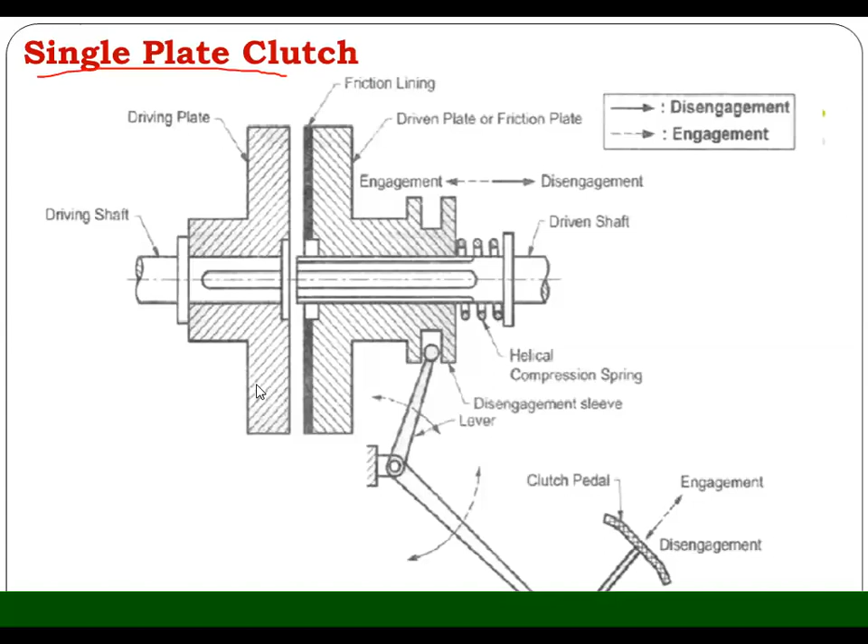Okay. Now, from the syllabus point of view, we had only single plate clutch. That is the reason why we discussed that in depth. Now, we will discuss another important, what we can say, part of the transmission system. So that is nothing but the gearbox. So very first thing is why we need it. What is the need of the gearbox? So obvious answer is what? To have a change in speed.

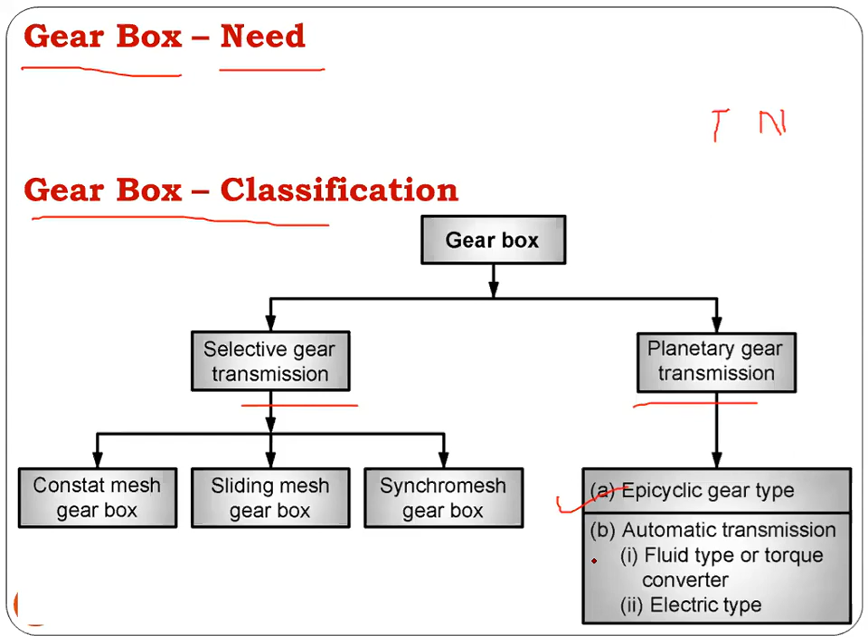Okay, so now we will see the classification of the gearbox. Gearboxes basically are classified in two types. One is the selective gear transmission, and second one is the planetary gear transmission, in which the very first gearbox is epicyclic gear type, also known as epicyclic gear train. Then one more is there, that is nothing but the automatic transmission, in which we have fluid type or the torque converter, and then we have electric type.

Okay, but we don't have this in our syllabus, and what we are going to discuss is nothing but the sliding mesh gearbox as well as the constant mesh gearbox. In addition to these two, we also have synchro mesh gearbox. Nowadays, many of the vehicles have this kind of gearbox. The gearbox which was developed initially is nothing but the sliding mesh gearbox. Then from sliding mesh, we went to the constant mesh. And from constant mesh, the development is nothing but the synchro mesh gearbox. Okay. So I hope up till now you are clear.

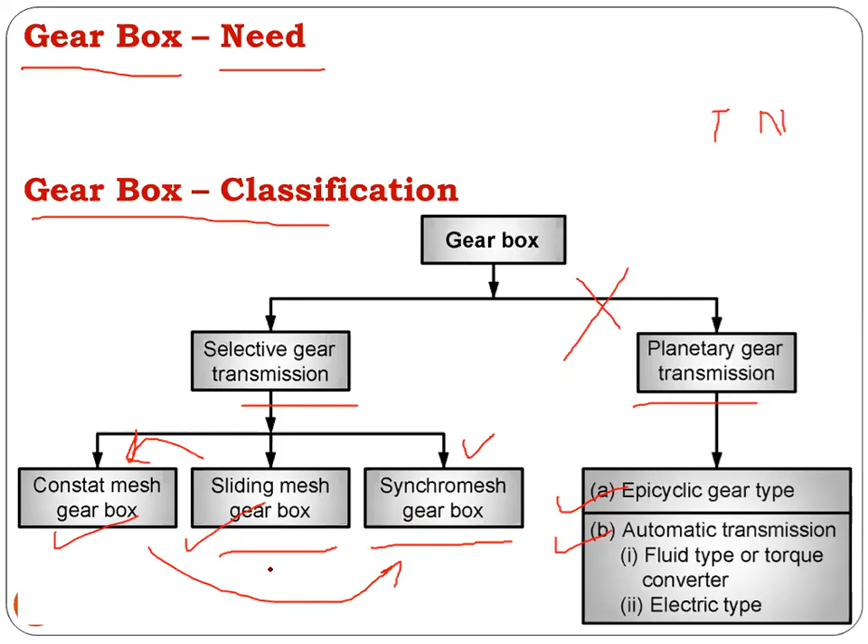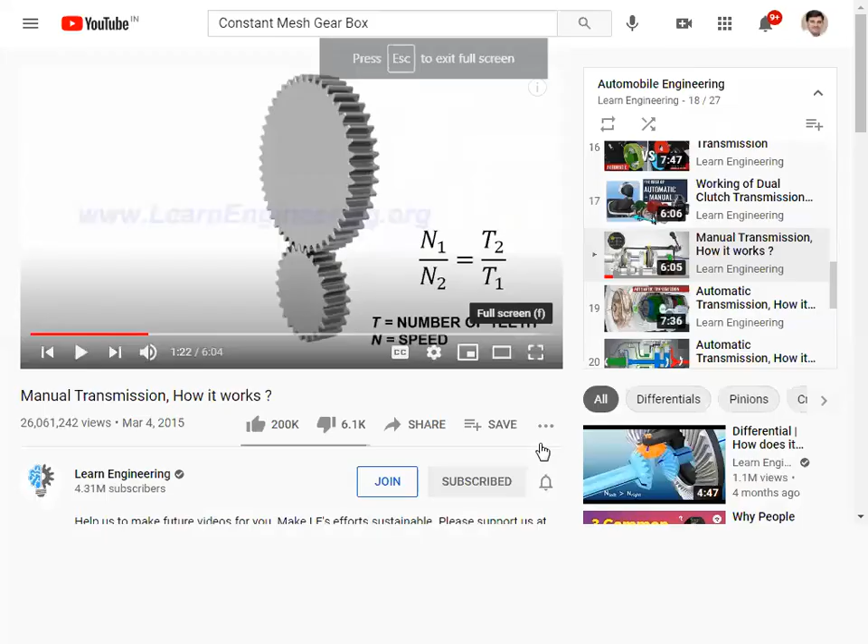Here. Now when we have change in speed, see, suppose gear 1 is there and gear 2 is there. If gear 1 is rotating 1 revolution, obviously gear 2 is going to rotate more than 1 revolution, isn't it? So this is how we can have change in the speed with respect to the gear teeth and gear diameter. Same funda is used in all gear drives. Now we will go through the working.

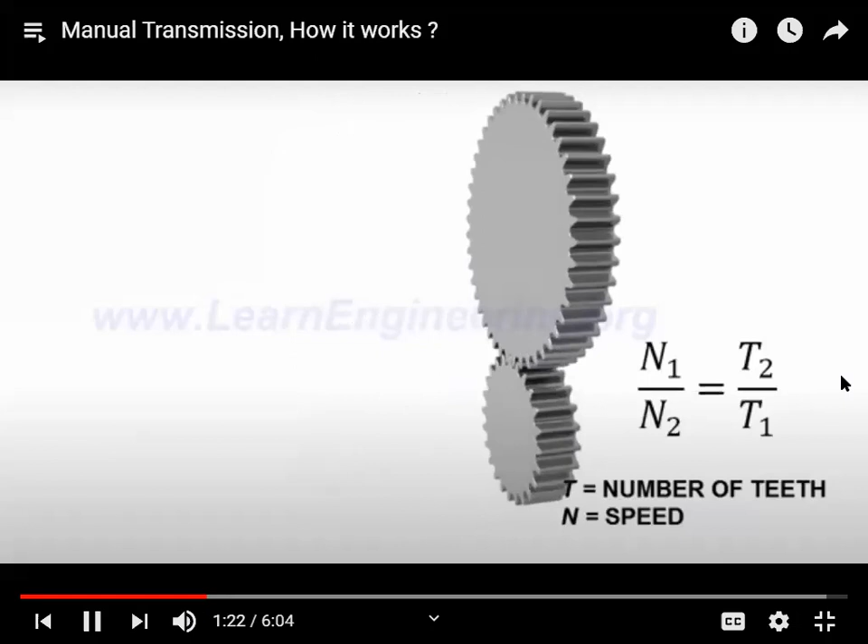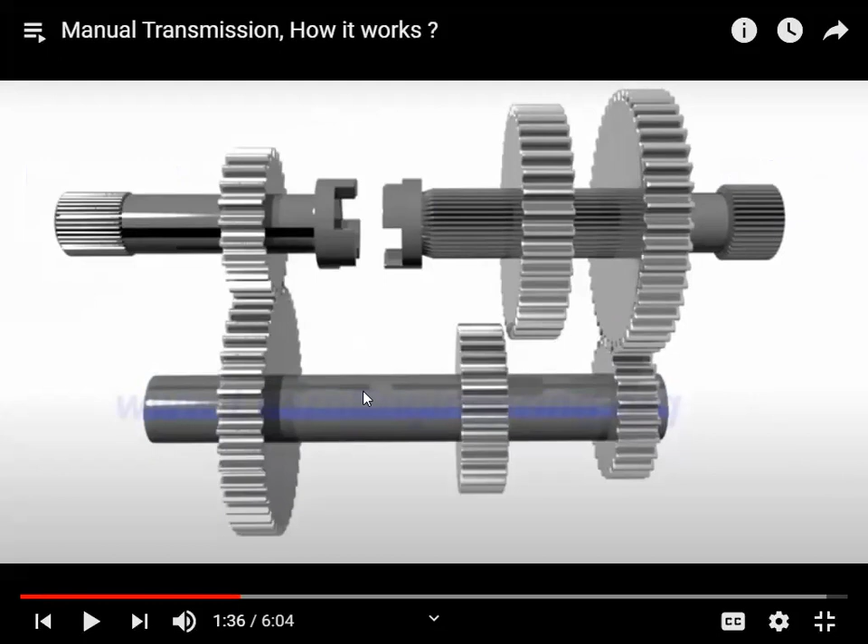A basic transmission mechanism is shown here. Here, the input and output shafts are connected through a counter shaft. A 3-speed mechanism will look like this. Now in this video you can see how the spline shaft looks. This is the spline shaft and on it you can see the different splines, isn't it? And here you can see one plain shaft, and on that plain shaft a key, K-E-Y, is inserted, isn't it?

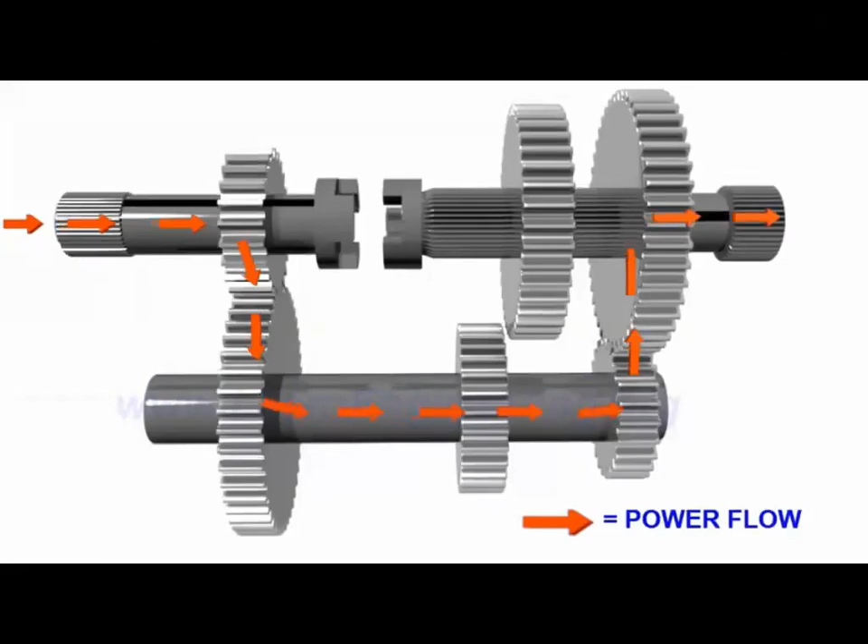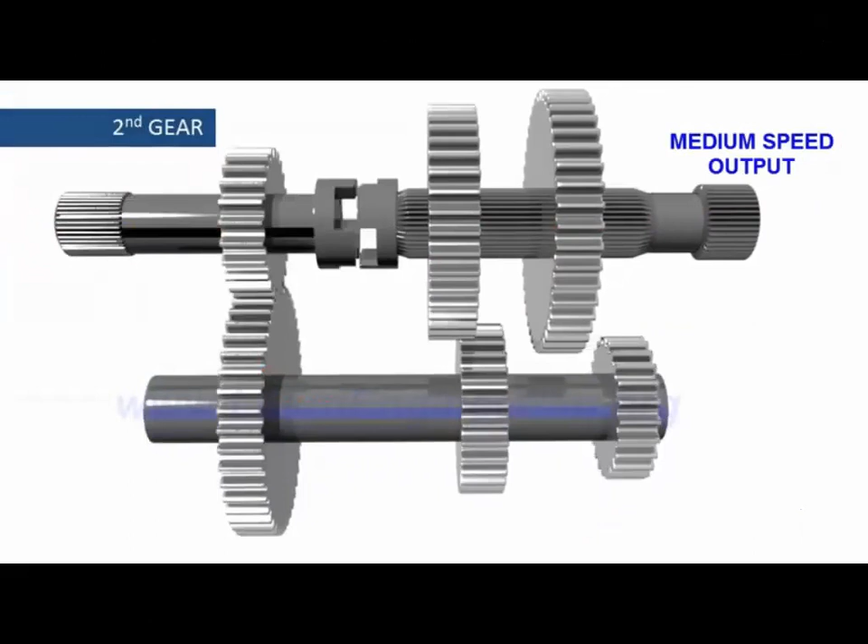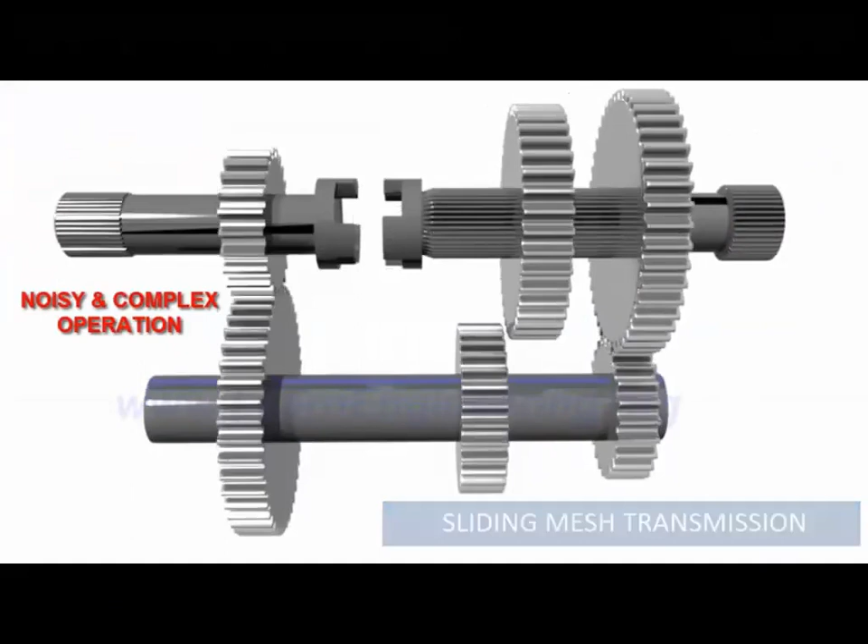It is clear that just by sliding the gears, we can achieve different transmission ratios. This transmission is more specifically called a sliding mesh transmission. They are good for controlling the speed, but they have an inherent disadvantage. It's quite tricky to slide from one gear and engage with another gear. But the disadvantage of the sliding mesh transmission is that it is quite a complicated one, isn't it? Our next gearbox is the constant mesh gearbox, which I will show you from the diagram. Can you see the PPT?

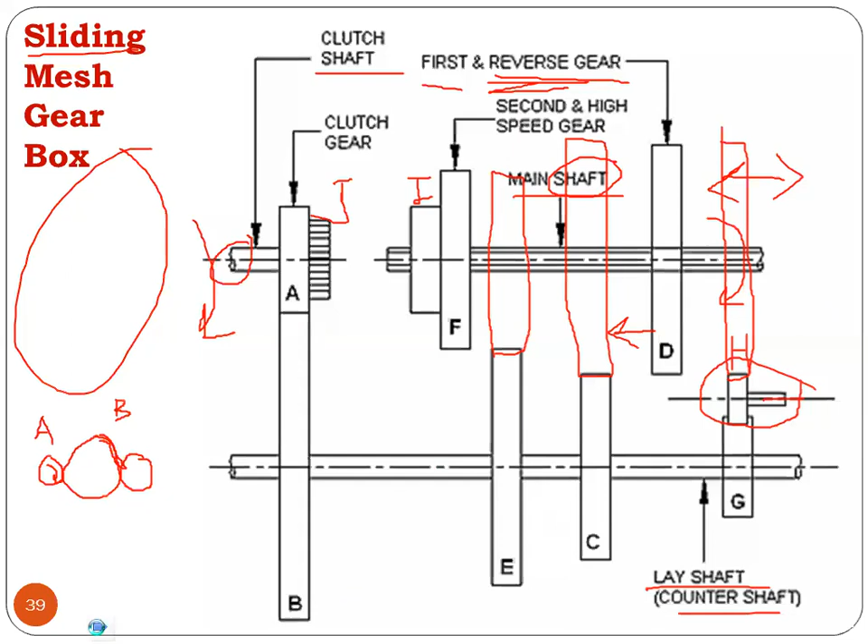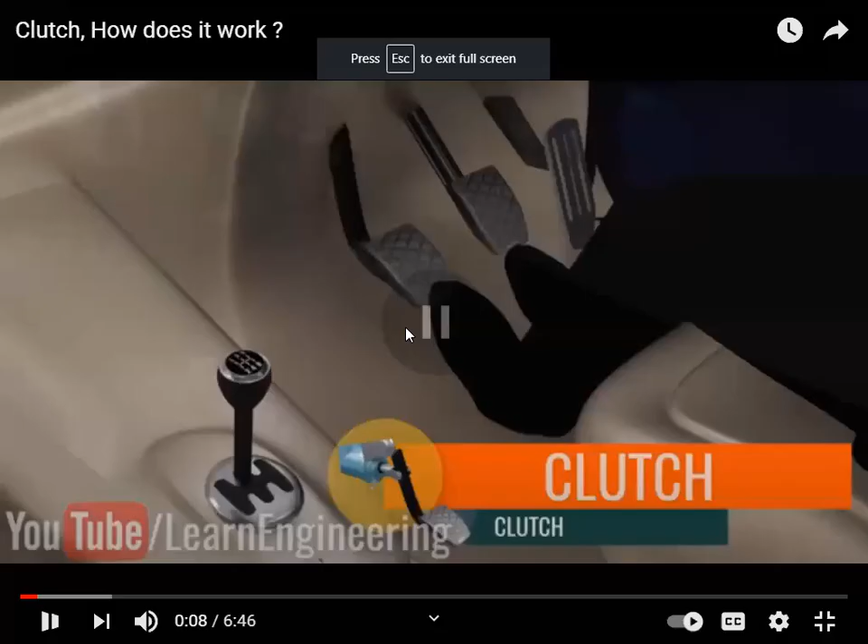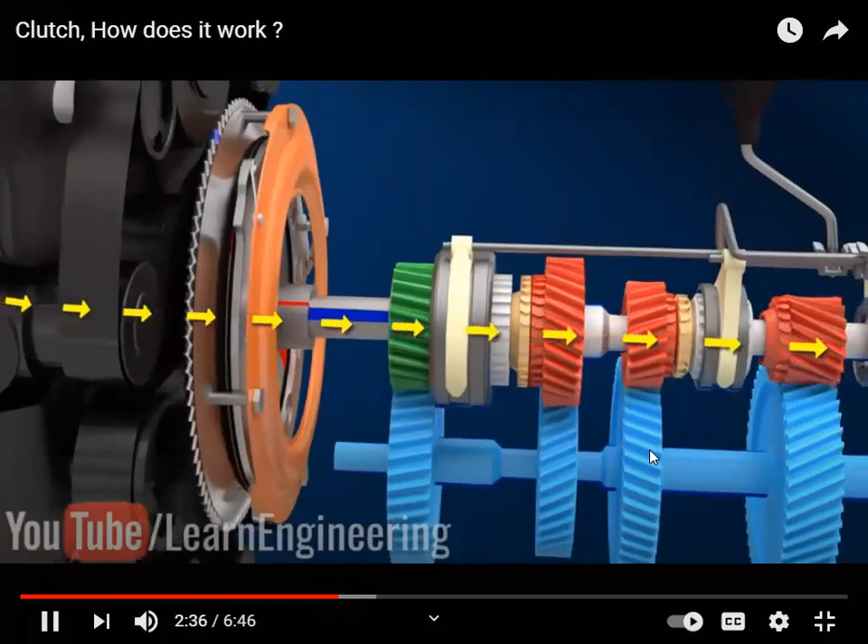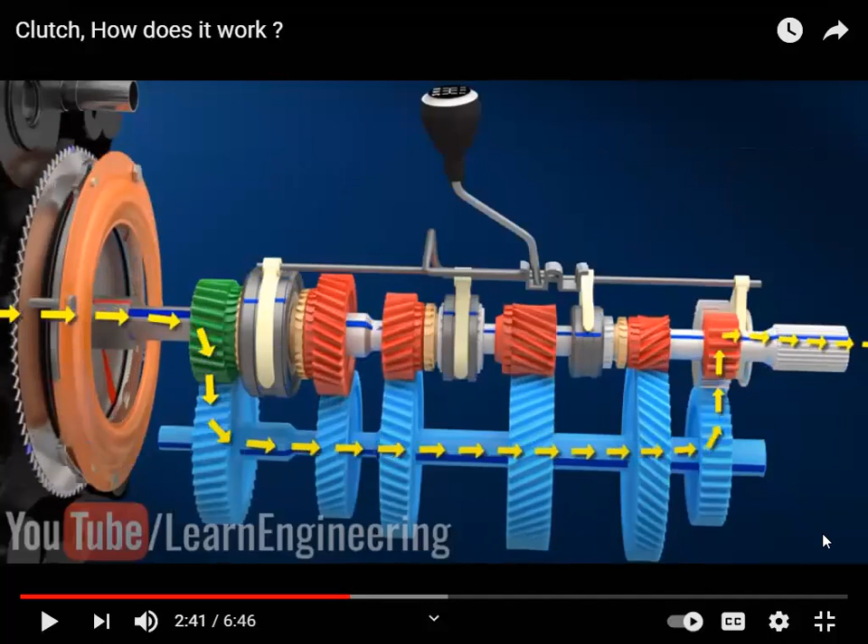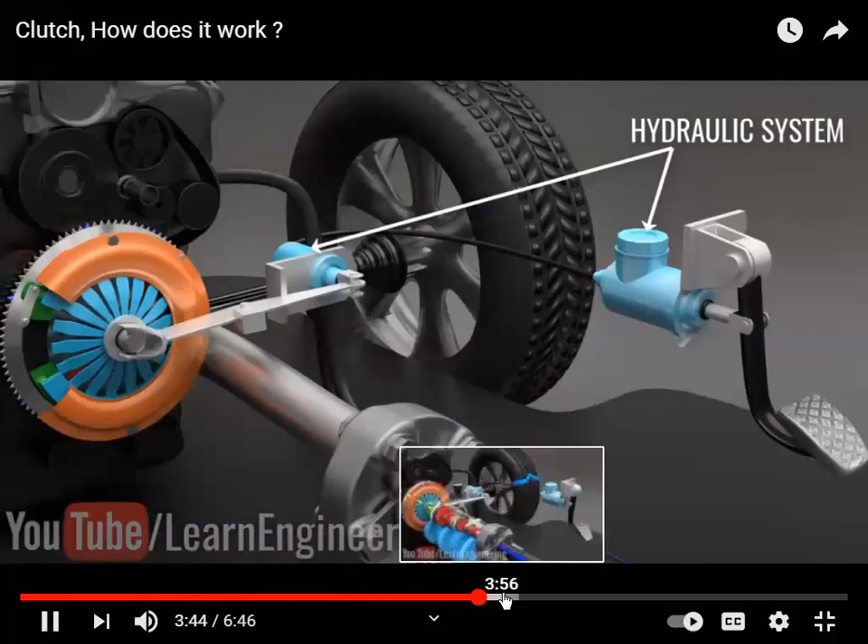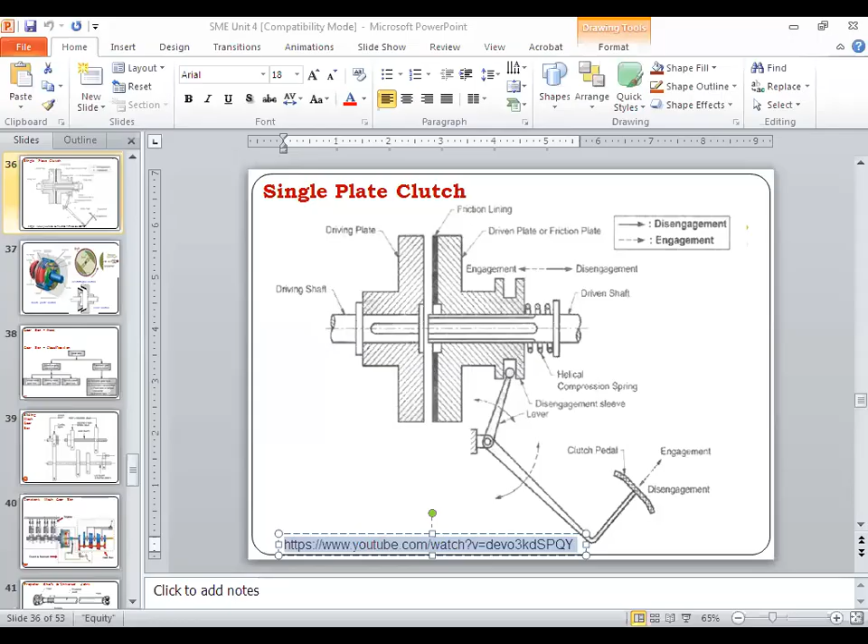Have you understood the working of the constant mesh gearbox?